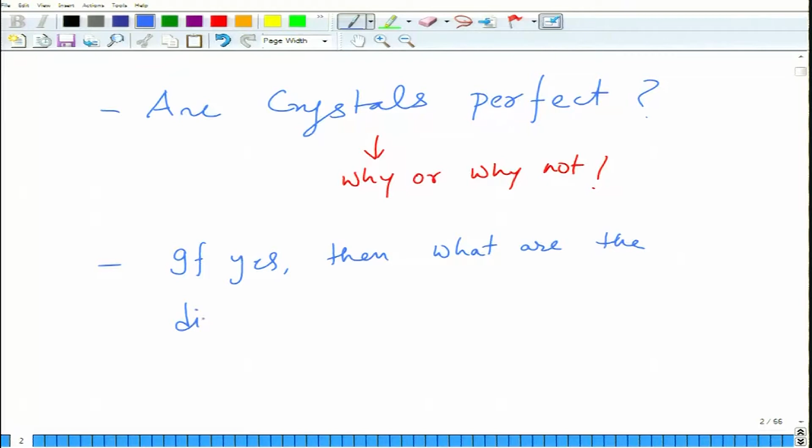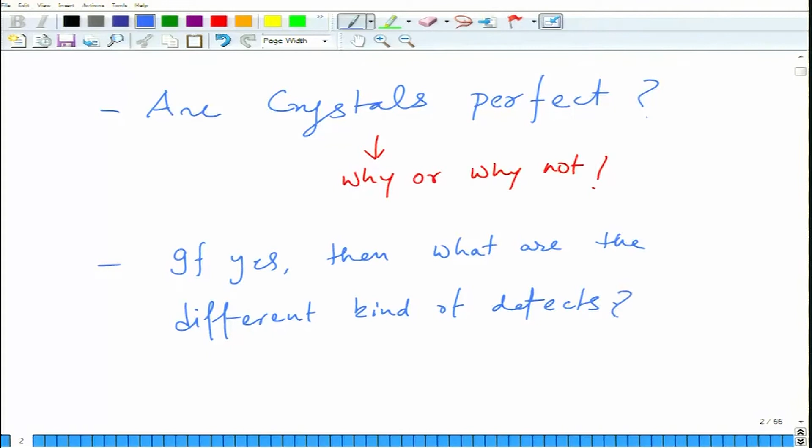But structures are not perfect, like everything else around us. There are imperfections in crystals, which is what we are going to talk about in these next three lectures. So the first question is, are crystals perfect? And the second question we answer is, if they are not perfect, why or why not. And then, if yes, what are the different kinds of defects. So let us first begin with the first question: are the crystals perfect?

Well, before we talk about the defects, let us first look at the atomic arrangement in a perfect material. So let us say we have a material in which atoms are arranged in this fashion.

So this is basically, we can say, a periodic structure, but it is periodic across the whole volume of the material. So whether it is 1 nanometer, 10 nanometer, 100 nanometer, 1 millimeter, 10 millimeter, or 1 meter, wherever you look, the atomic arrangement looks the same. So if it is a layer, it is a layer all throughout that surface of the material, and there is no other orientation that is present.

So such crystals are called as... if you draw such a crystal, for example, a crystal might be this, and these are macroscopic dimensions.

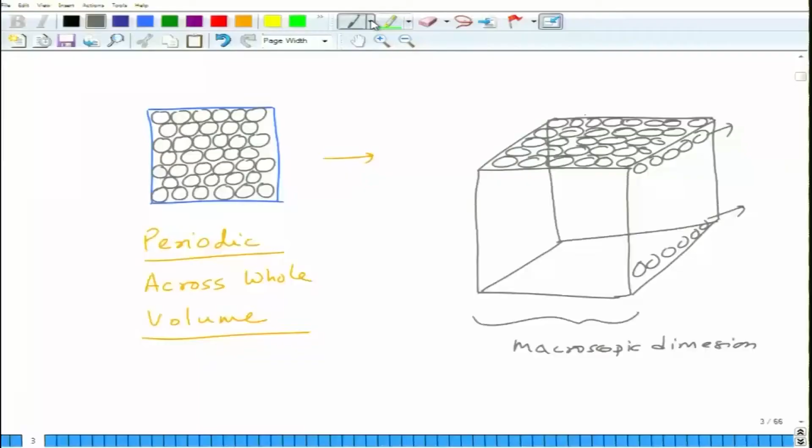So these are called as single crystals. Now, life is not very kind to us in most occasions.

What happens in reality in most cases is that materials are like this. You have an enclosed volume like this. Within one volume you may have an arrangement of atoms in this fashion, in the next volume it could be something like this, and in the next one it could be something else.

So you can see that there is a distinct change in orientation here, right. This is a different direction, and this is a different direction, and this is a different direction. You can see there is a distinct change in the orientation of the crystal across the volume.

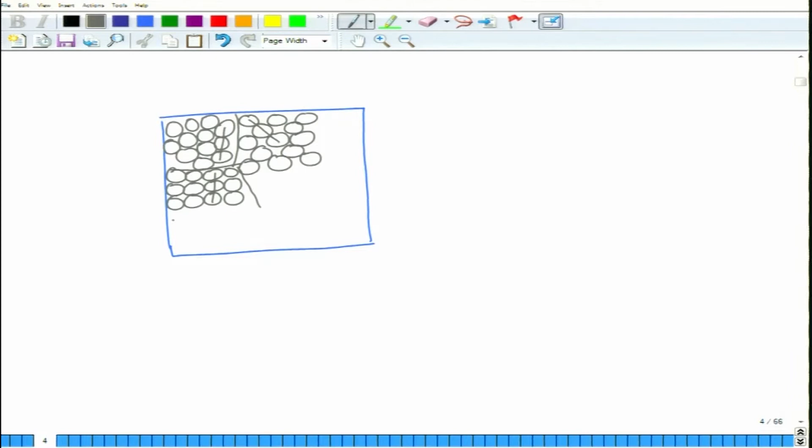So as a result, if you now divide this into several regions, let us say these are the regions: here it is like this, and here it could be some other orientation.

So if I take only the close-packed direction, in this case it happens to be here, in this case it happens to be here, in this case it happens to be here. So it is all over the place, right.

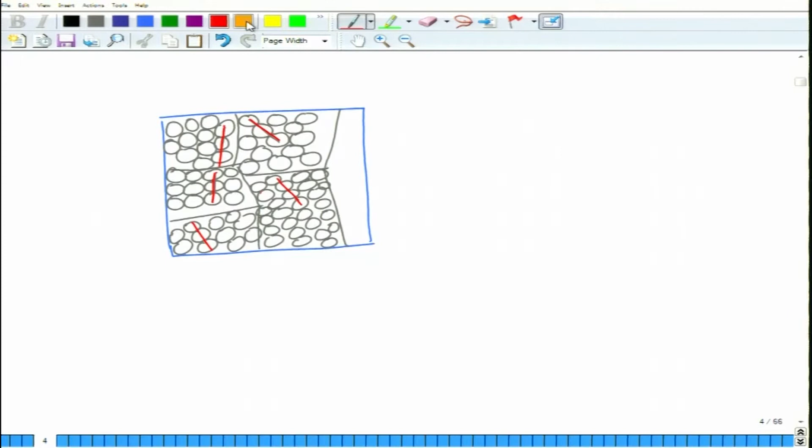So the same HKL direction has different orientation in different places, and these regions which depict different crystal orientations are called grains, and the boundaries between them are called grain boundaries. So one region of uniform orientation is called a grain, and where the orientation changes abruptly between two regions, they are called grain boundaries.

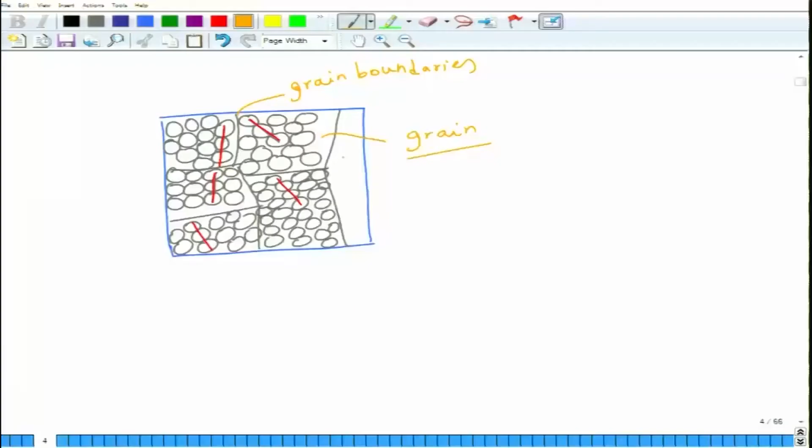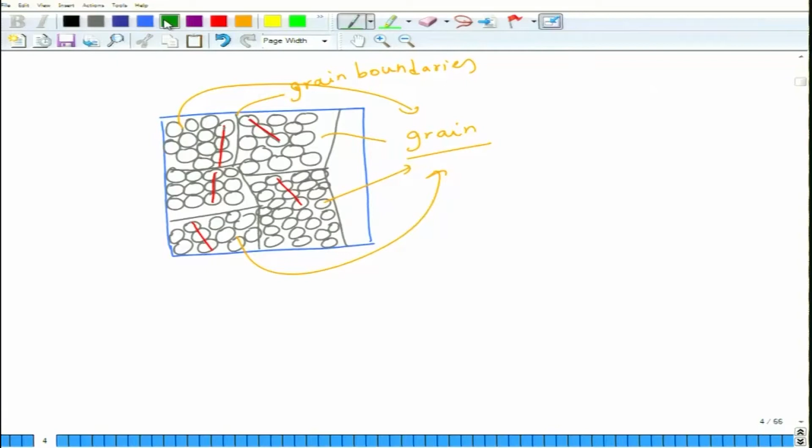So this is a grain, this is a grain, this is a grain, this is a grain, and the boundaries between them, the discontinuities or abruptness between the two, are called grain boundaries. So this is called a polycrystal, or polycrystalline material.

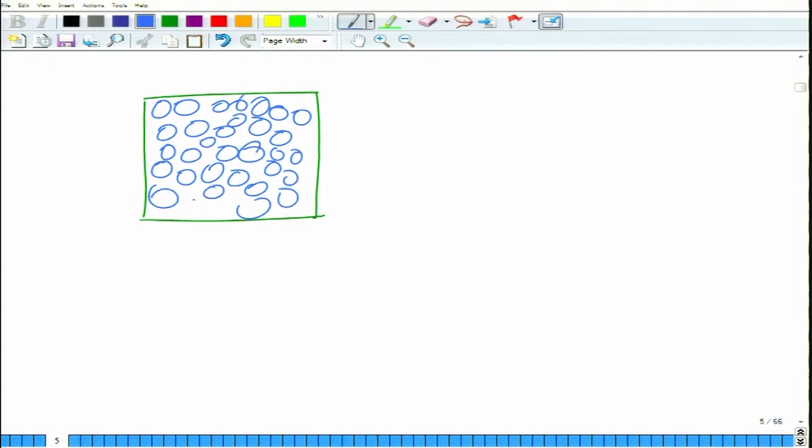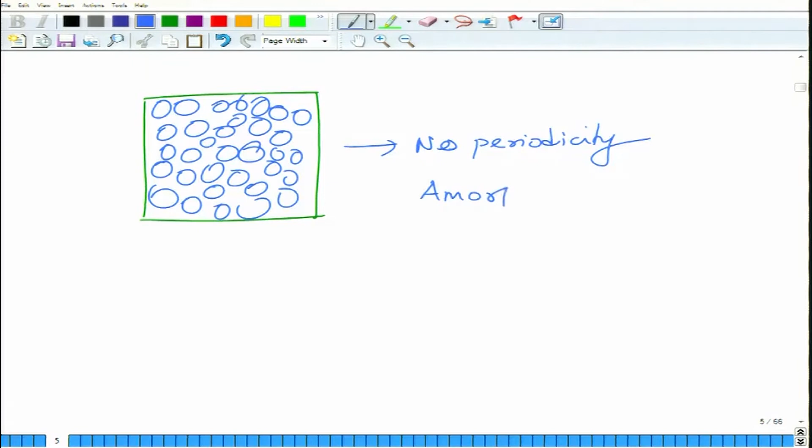Most materials happen to be polycrystalline. So grain boundaries do exist in most materials, and in some cases you can have atomic structure which has no periodicity, no long range periodicity, and as a result this is called amorphous or glassy solid. So these are the three classes of materials, basically dependent upon the length scales over which the atoms are arranged in a certain fashion.

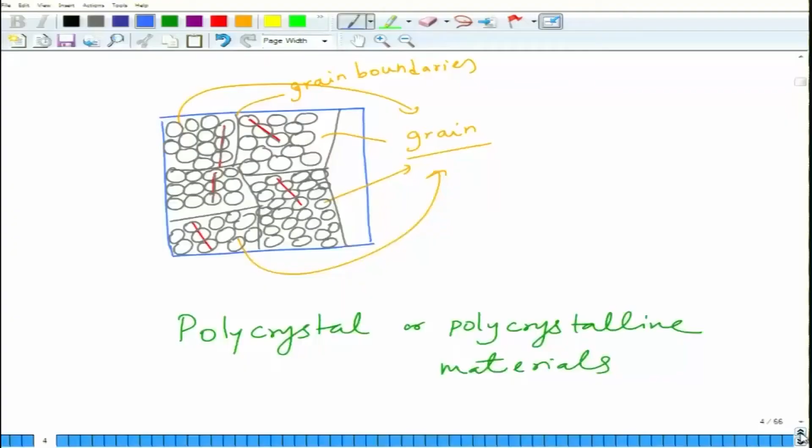In a single crystal, the atoms are arranged in a uniform orientation across long length scales, that is what makes a single crystal. It has a uniform orientation all across the surfaces; every face has a specific orientation, a specific arrangement of atoms.

In a polycrystal the arrangement continues only within a grain, and the dimension of a grain can vary between a few nanometers to typically a few microns. It could also be a few millimeters, but generally it is limited to microns. The moment it goes to millimeters, we call it a quasi single crystal, because you can break the material into small single crystals. That is why we say it is few nanometers to few hundreds of microns.

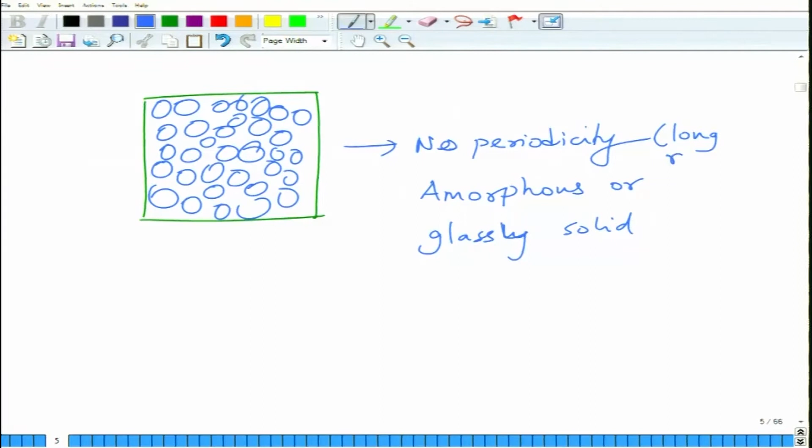And then we have absolutely no periodicity, no long range periodicity. There could be periodicity on short scales like 5 nanometers or so, but the moment you cross that barrier there is no periodicity. These are amorphous structures.

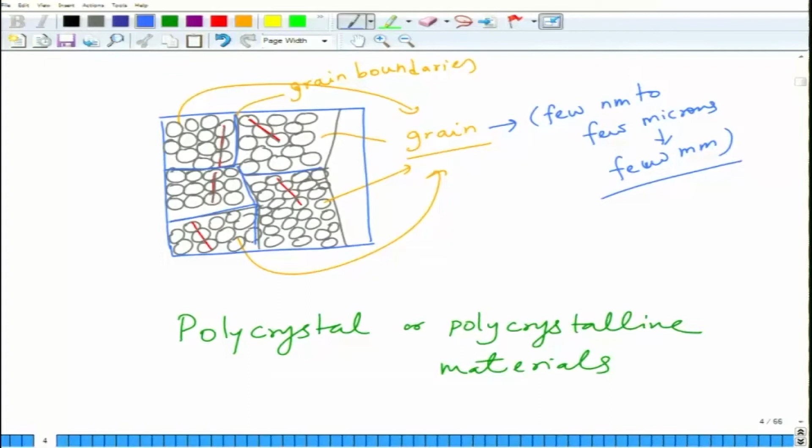You can see that in this structure there is a discontinuity at these regions. These regions are defects, called grain boundaries. But there are a lot of other kinds of defects present in materials, as we will see in the next few slides.

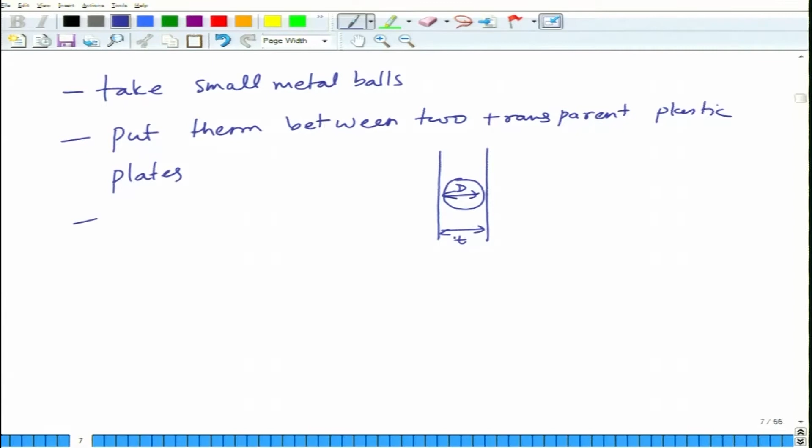So this is one plate, this is another plate, and the spacing between the plates is the same as the diameter of the ball. So this is the thickness spacing, T is nearly equal to D.

Leave some volume free so that balls can move around, shake it, and then allow balls to settle, and then observe the arrangement, because each ball can be considered as an atom.

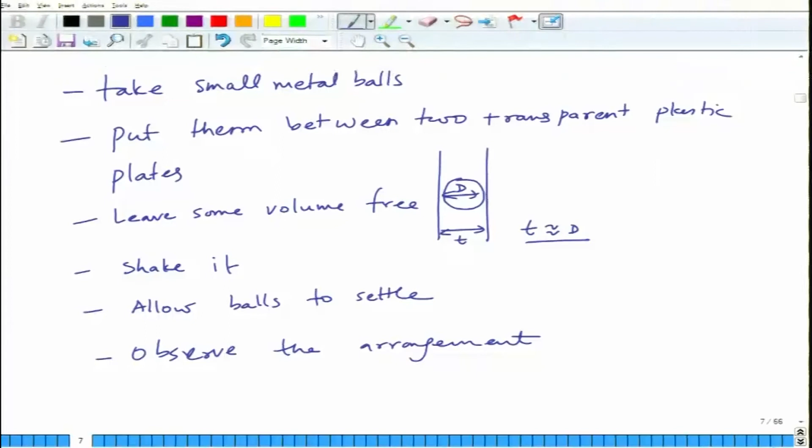Bubble raft model you can also look at, you can go to YouTube, and there are a lot of experiments which have been done using the bubble raft model that you can look at.

So if you do this exercise, what we will see is that there are a few kinds of defects that we observe. The defects that we observe are categorized into 3 categories.

The first kind of defect that we observe is called a point defect or 0-dimensional defect. Basically what we see there is a missing atom, which is called a vacancy. We are mostly going to talk in terms of metals, but the same could be true about ceramics as well, making sure the ceramic is electrically neutral.

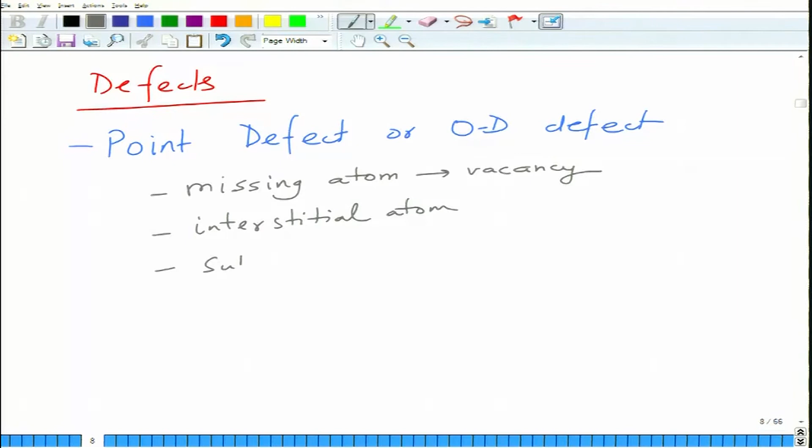So you have a missing atom, and then you can have an interstitial atom, and you can have a substitutional atom. This would be true in case of metals and other materials. In case of ceramics, you can also have defects such as Frenkel defects and Schottky defects in ionic solids.

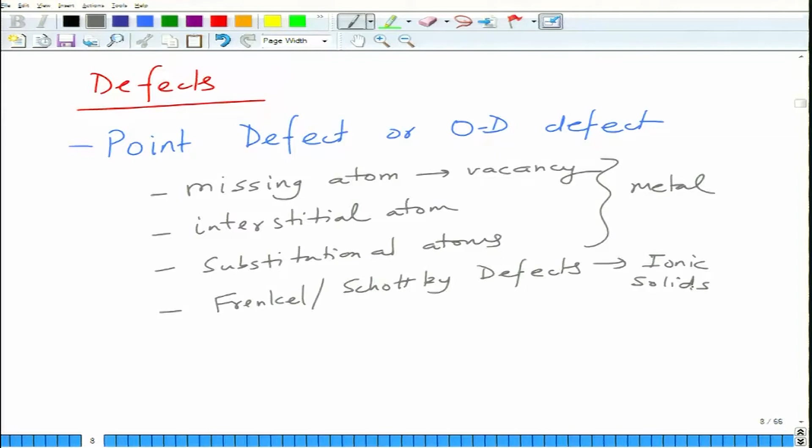The second level of defects in terms of dimensions would be 1D defects, and here we talk about lines. So these are also called line defects. Here the categories are edge dislocation and screw dislocation.

The third category of defects is called 2D defects, or surface defects. Here we talk of defects such as grain boundaries - in general surfaces are defects because they have dangling bonds. You can also have twin boundaries, stacking faults, etc. There are many other 2D kinds of defects. We perhaps would not be able to discuss all of them, but we will see some of them.

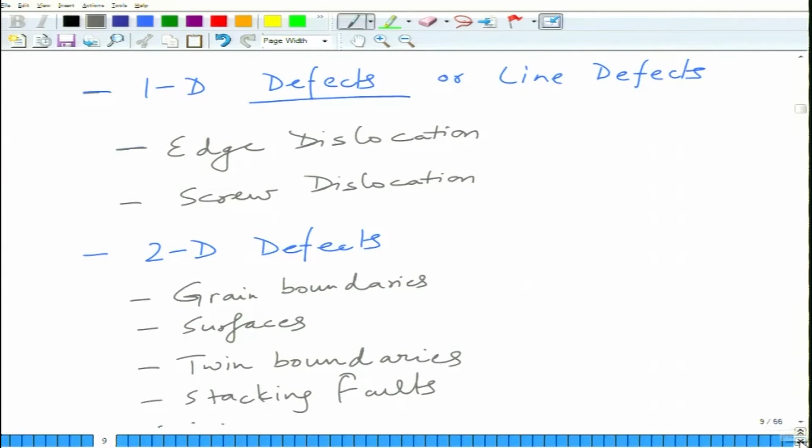So now let us first begin with the point defects.

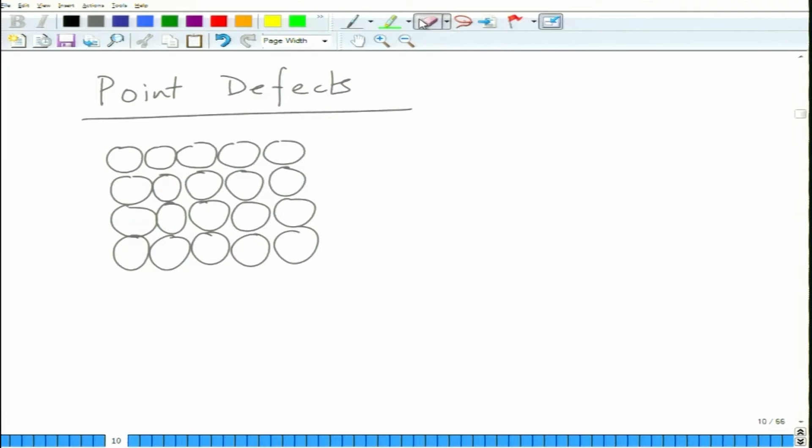So in this category of defects, we first consider the vacancies. So a vacancy basically could be - you have a structure of atoms like this, they make a periodic structure, and if one of them goes out, let us say this guy goes out, so this is a vacancy.

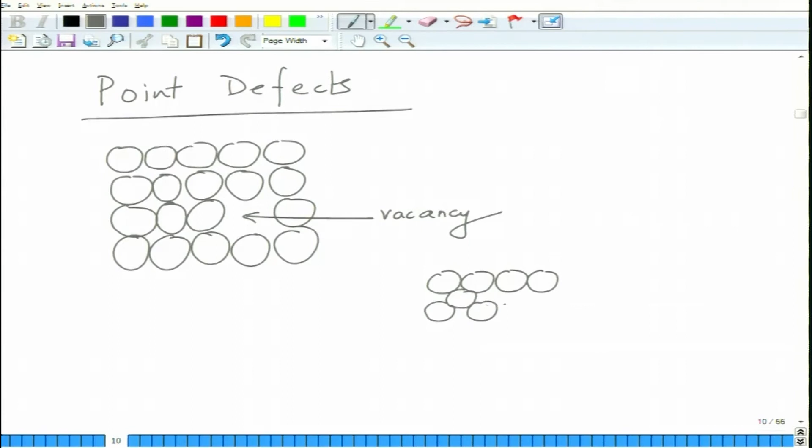You can have a self interstitial, for instance - you can have a structure again in this fashion. There is one atom which is squashed somewhere here, of the same type. As a result, it has dilated the lattice to some extent, so there is a lattice distortion. This is called a self interstitial.

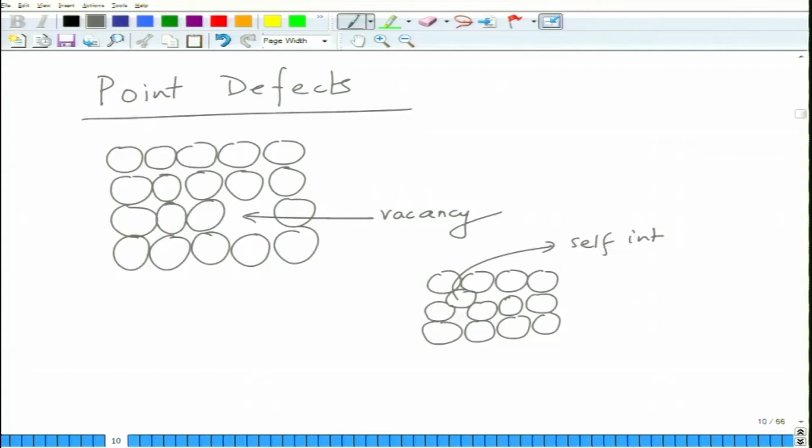So as you can see, if you have a vacancy, you will have some distortion in the vicinity of the lattice - this will lead to distortion and have a strain field. Similarly, if you have this interstitial atom, it will lead to distortion. In one case you will have compressive stresses, in another case tensile stresses. Here you expand the lattice, resulting in compressive stresses. Here you compress the lattice, resulting in tensile stresses. So these will lead to their own stress fields - these are two kinds of defects.

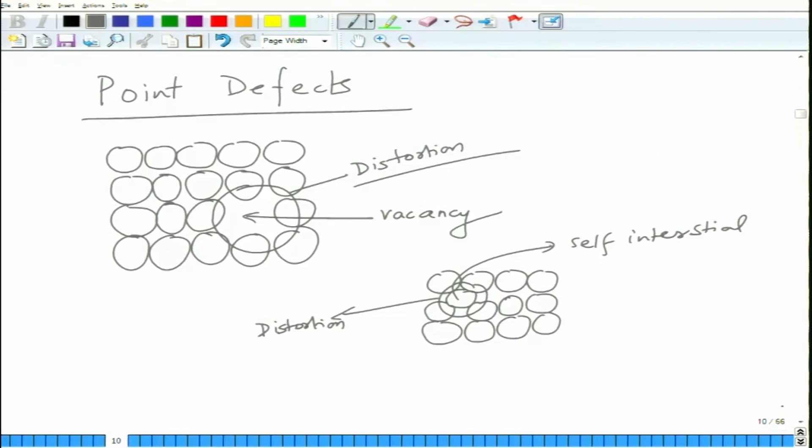Another kind of defect could be substitutional atoms. So this is your normal structure of a metal or material, and let us say I replaced one by a different one - so this would be a substitutional atom.

It is also a point defect. Depending upon the size of this atom, it can create tensile or compressive stresses. You can have an interstitial atom sitting here, again it would give rise to stresses depending upon the size of this atom with respect to the void size.

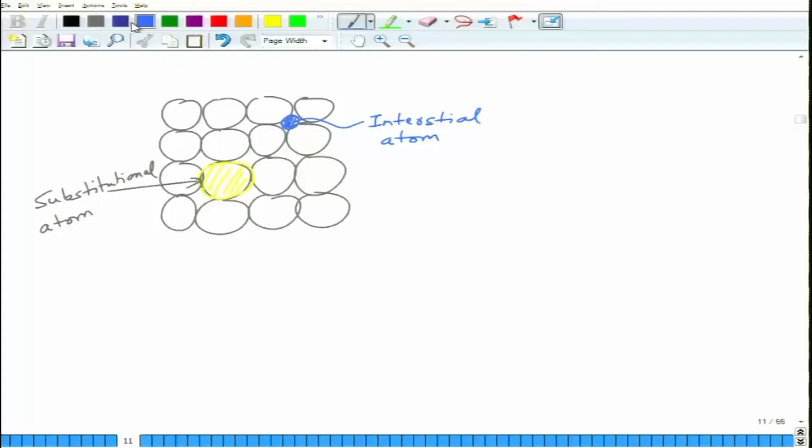So these are various defects that you may have. These defects may exist together, or they may exist independently, depending upon the type of impurities present in the material. In case of ionic solids, let us say you have an ionic solid.

The first ionic solid, the best ionic solid that we know, is NaCl. In NaCl, we know that chlorine goes to face centered sites, and sodium goes to interstitial sites, which are these.

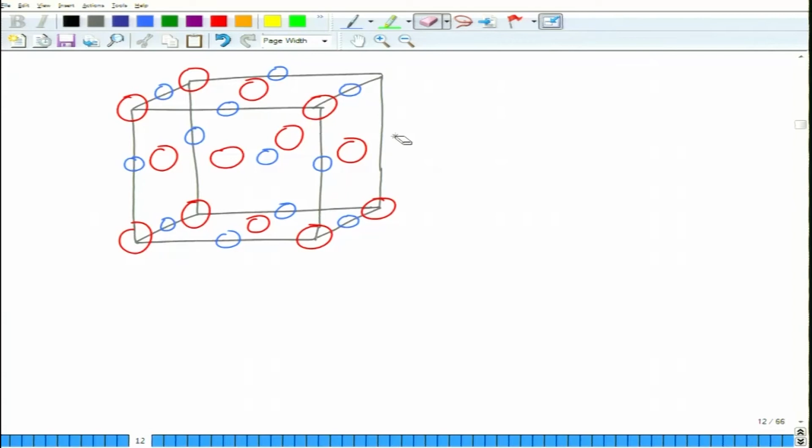Now here, what might happen is if you remove one of these atoms, then to maintain electrical neutrality, this also goes away. As a result, you will have this as vacant. So this is VCl, and what you will have here is VNa.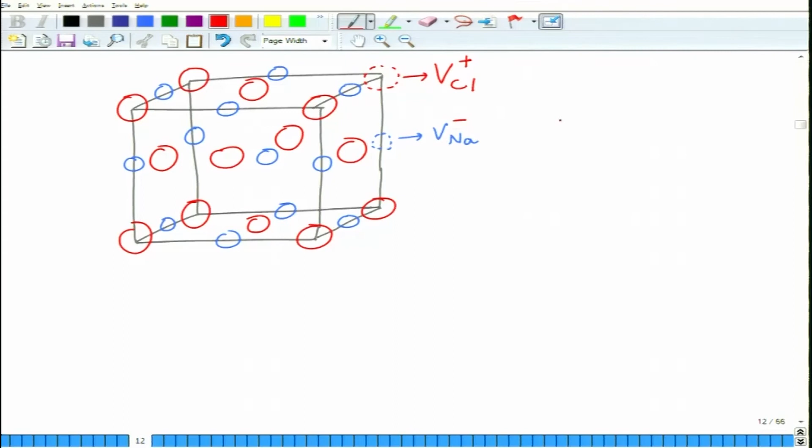These are charged. V chlorine is charged oppositely to the chlorine ion. So this will be positively charged, this will be negatively charged, and this pair is called Schottky defects. So in case of sodium chloride, it would be VNa and VCl.

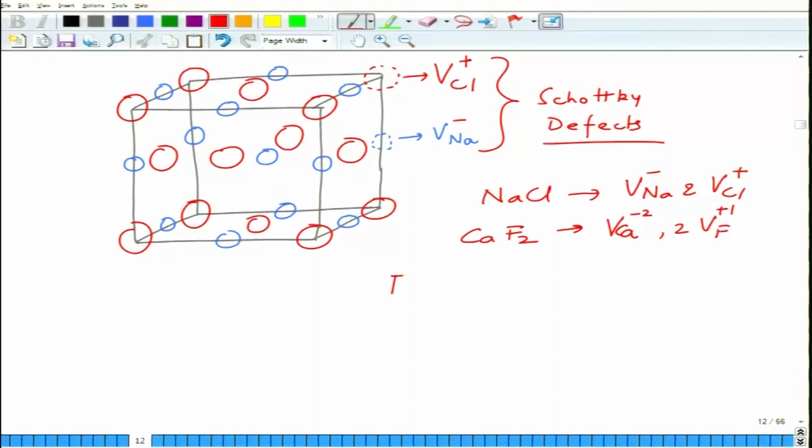In case of calcium fluoride, it would be VCa minus 2 and 2 VF plus 1. If you have Fe2O3, you can basically have 3 oxygen vacancies, which give you plus 2, and 2 iron vacancies, which will be minus 3.

Charge neutrality is to be maintained. So for Fe2O3, this is analogous to saying you have 3 VO2 plus 2 VFe 3 minus, or you can say Fe 2 by 3 O. This becomes VO2 plus 2 by 3 VFe 3 minus.

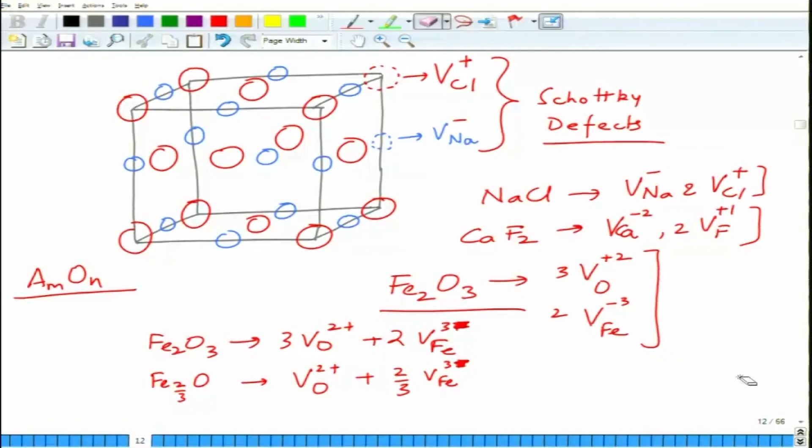Accordingly, for a solid AmOn, you can have the formulas written. Similarly, you can write for AO2 and things like that. So this is the way you write the Schottky defect.

Then you can have Frenkel defects, which are another kind of defect. If you have a solid AX, the X from the X site goes to an X interstitial, creating a vacancy of X. Since X is an anion here, Xi would be negatively charged. So if it is charged 1, then it would be -1 and this would be +1. So your structure would look like this.

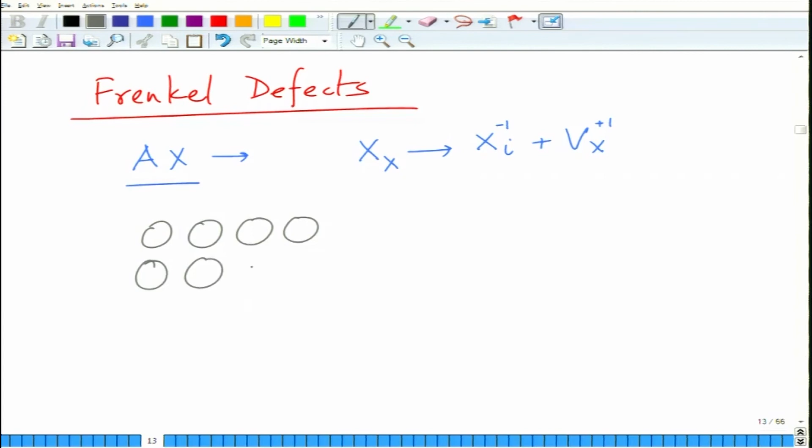Your interstitial ion is this X. This X has gone missing from its own site, so this is now vacant, this is Vx. It has gone somewhere here, let us say this is your Xi. So this is your interstitial, and this is your vacancy.

So these are called Frenkel defects, and there is another category called anti-Frenkel defects, where the same happens with the cations. So you can have cation interstitial, cation vacancy, anion interstitial, anion vacancy - a variety of defects are possible.

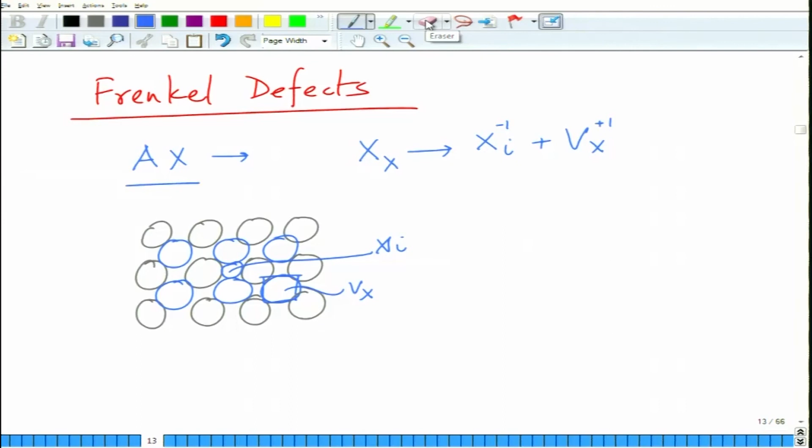In case of ionic solids, it is important that you maintain the charge neutrality. So ionic solids need to ensure that charge neutrality is maintained and mass is conserved.

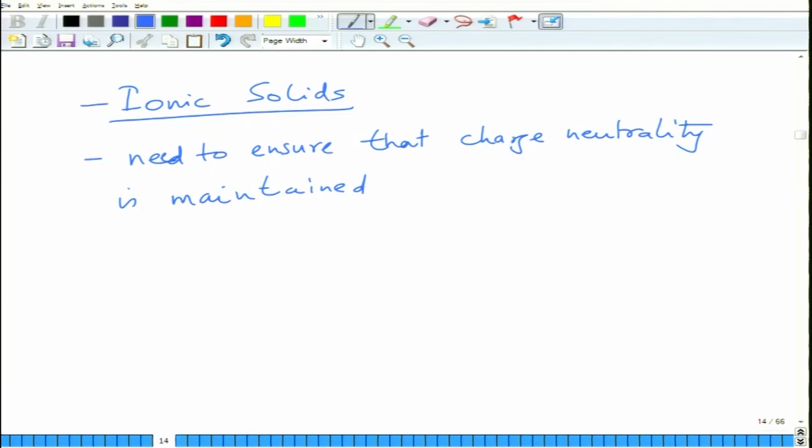So this is about the point defects. What we will do next is some discussion on the concentration of point defects in a material, because these defects are equilibrium defects whose concentration is determined by the temperature. At a finite temperature, every material will have point defects no matter what the situation is. These are thermodynamic defects - you cannot eliminate them, you can only reduce their concentration by changing the temperature, but they do exist. So we will do a simple thermodynamic analysis in the next lecture and calculate their concentration in the materials.